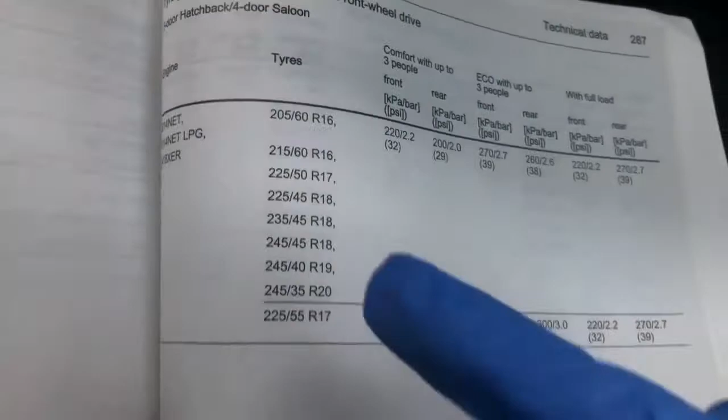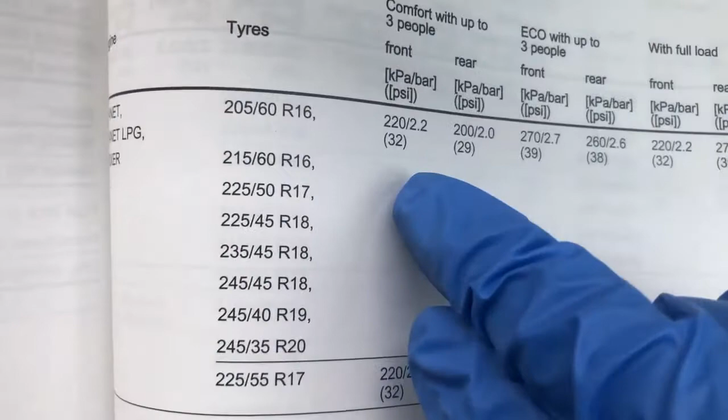So if you look at your manual on page 286, I think it is here, you will see, obviously you'll have to see which tire size you have, and it will show you the PSI pressures that you can put.

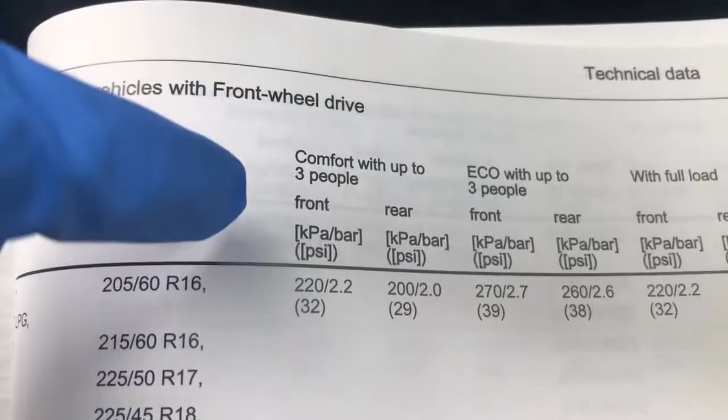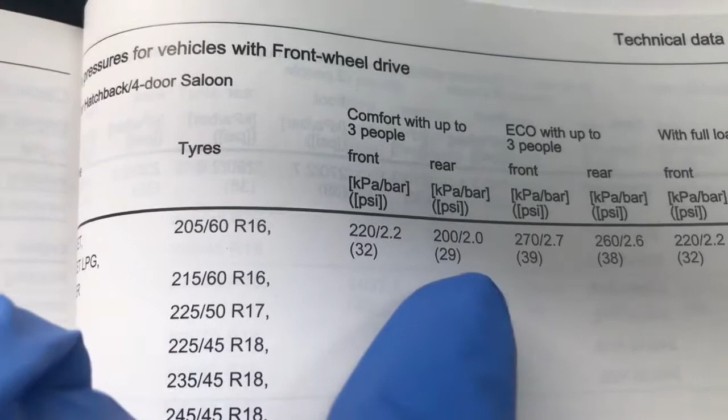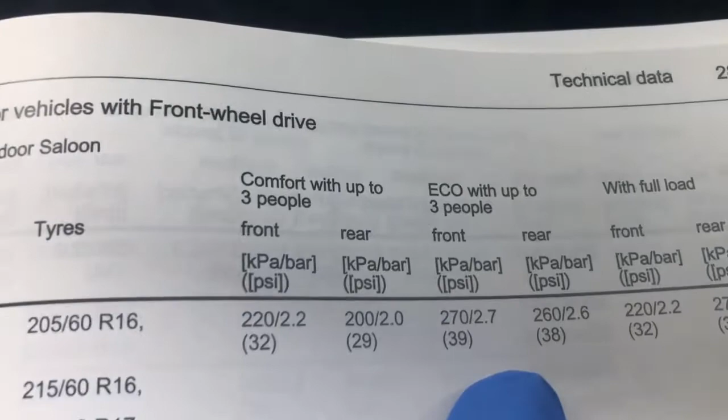So if you look here, it says for comfort with up to 3 people, you can put 32 PSI at the front and 29 PSI at the back, or 2.2 bar, same on this end. But if you're on eco mode, you ought to pump the front tires to 39 and the rear ones to 38.

So I was just driving along, messing around with the settings here, and I changed my settings to eco, where they were on light, without realizing, and then I did not pump the tires. So the light came on and the car is showing me that the pressures are too low. The fronts should be around 39-40, and the rear should be around 38. So the car is picking up on that and saying you need to pump the tires if you're running on eco mode. Now I've finally discovered that issue.

I've changed my settings back to light mode, or what they call it here as well, comfort. And now I'm just going to drive the car and see if that light disappears.

But another thing is, the manual does say if you're going to adjust the pressures, make sure the car is off. So car is off, adjust the pressures, then start the car, and then you need to drive it just to get the computer to process the new tire pressure and the light mode setting, and hopefully that should take care of that. So I'm going to give it a drive and see what happens.

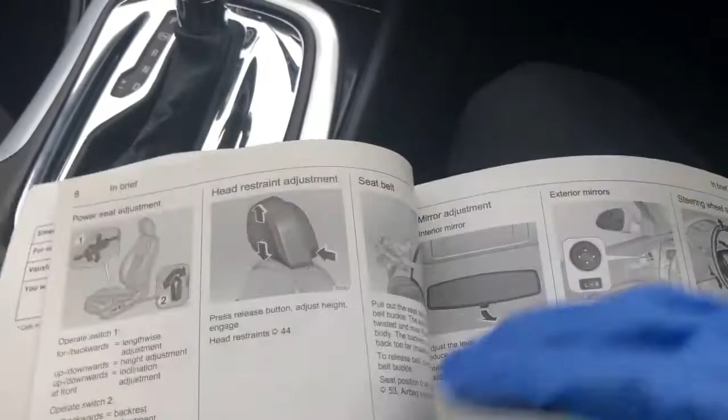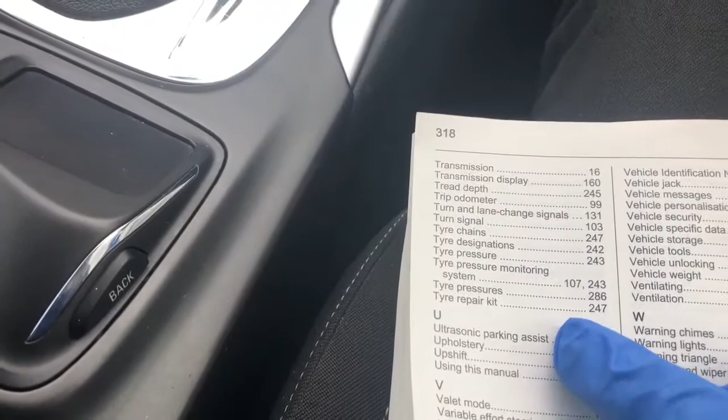It does say on the manual, I have seen it, that not all the models have the system, but if you haven't got that system, then you shouldn't have to worry about the tire setting situation. Let me just go here to tire pressure monitoring. So you have lots of menus here. Tire pressure, 243.

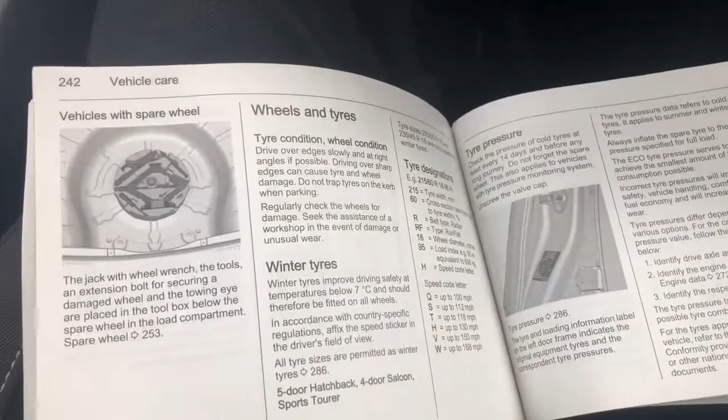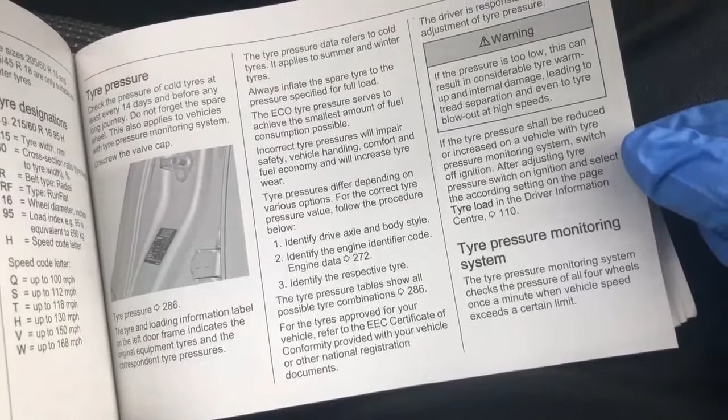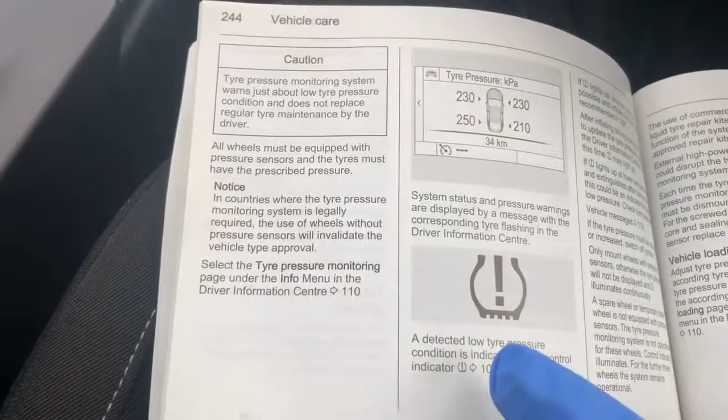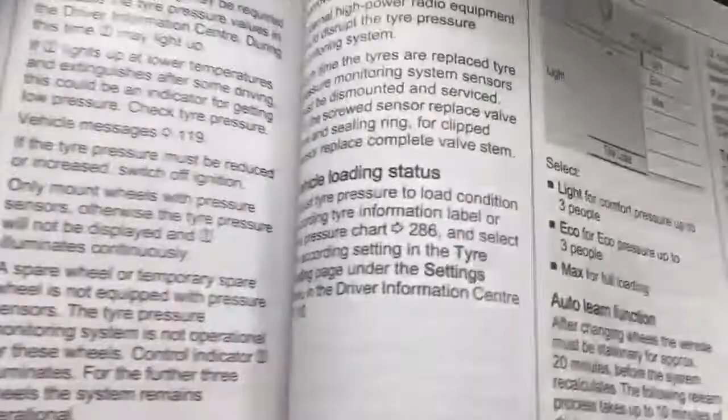Tire pressure monitor system checks the pressure of all four wheels once a minute when vehicle speed exceeds a certain limit. So a detected low tire pressure condition is indicated by the control indicator, that one there. And here's where it shows you about the different modes, the vehicle loading status, and it shows you there.

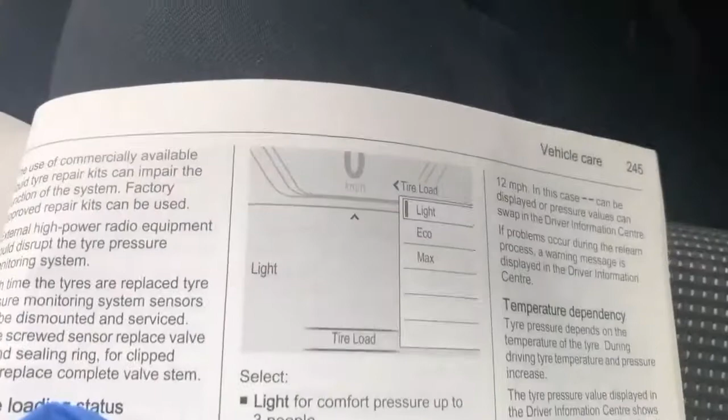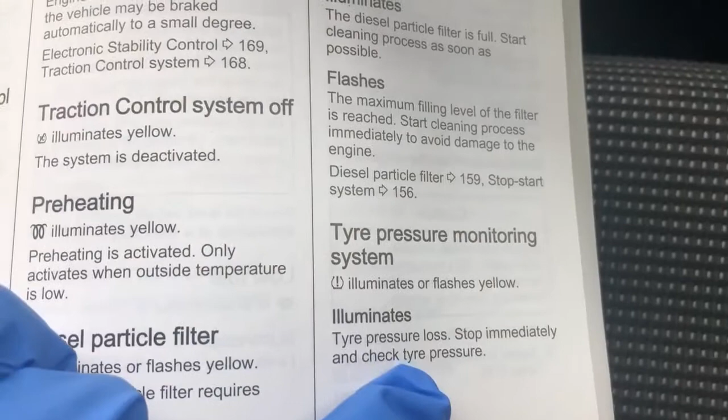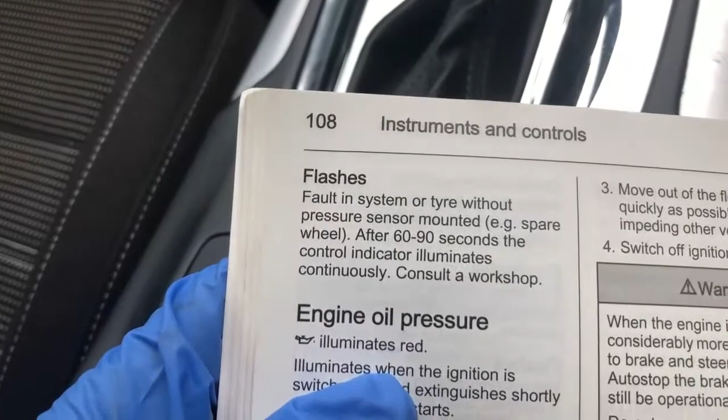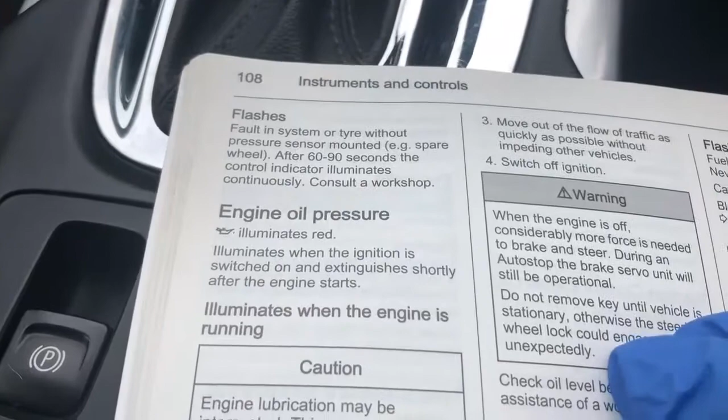So page 107 here. If you look at page 107, it's got the tire pressure monitor system - illuminates or flashes. Tire pressure loss: stop immediately and check tire pressure. If it flashes: fault in system or tire without pressure sensor mounted. So if you have the spare wheel on, it will flash because it can't detect the sensor, or if the sensor's gone faulty, then it will flash. If it just illuminates, it means you had a low pressure tire.

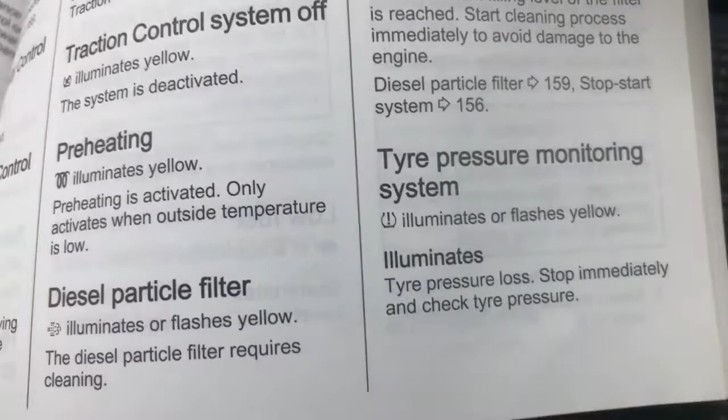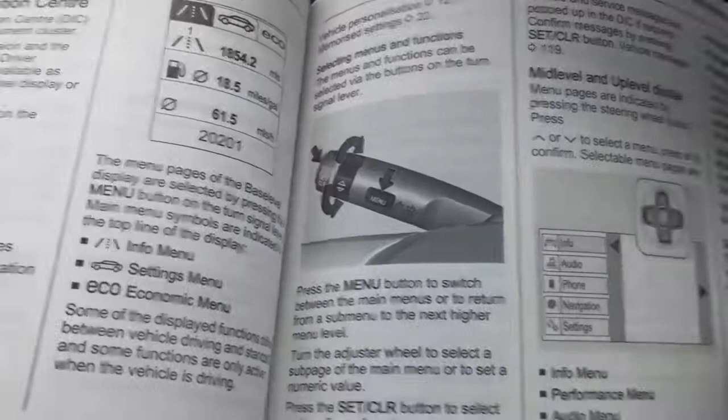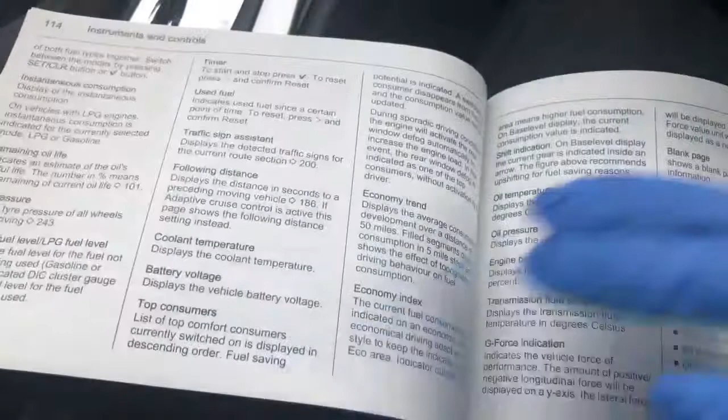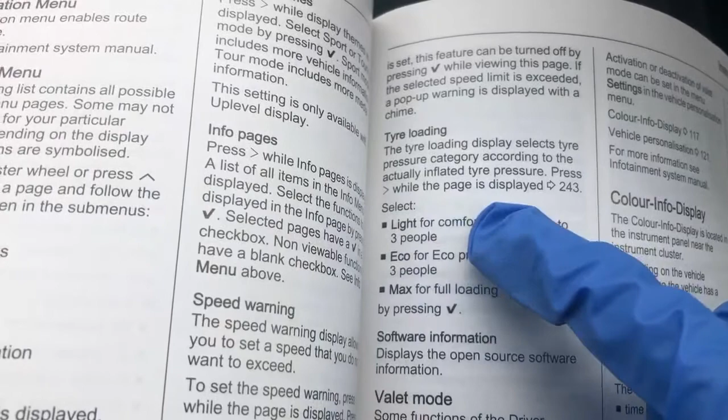And the rest of the manual here does show you, in some cars you're going to have this type of system, and you need to operate the lever on the side to access this menu, and that menu will take you to the tire load. So tire loading - tire load display selects tire pressure category according to the actual inflated tire pressure. Press while the page is displayed, and then you have light, eco and max again.

So just something to recap, that if that light is on, it isn't necessarily something to do with a fault. It could just be the settings. And well, again, I hope this video helps, and thank you for watching.